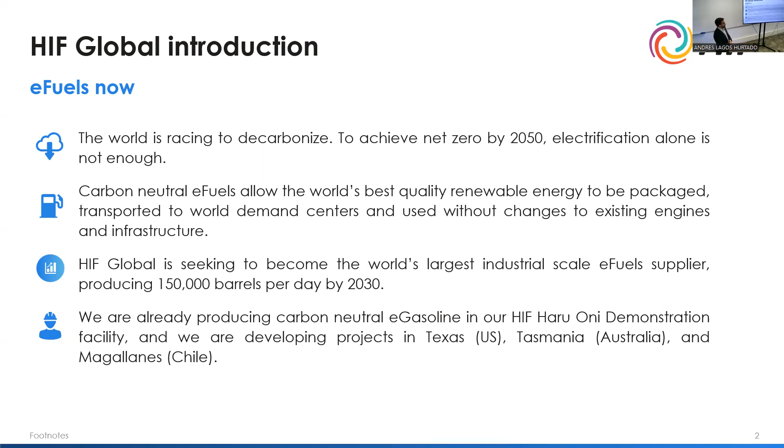We are already producing carbon neutral e-fuels in our pilot plant, demonstration plant in Magallanes, that has a wind energy turbine that turns power into gasoline. Okay, so why e-fuels? Electrification alone is not enough. That's our business case, because as you can see in the graph, we have in the y-axis the amount of energy per liter, and in the x-axis the amount of energy per kilogram of different energy carriers.

As you can see here, the lithium batteries are really close to zero. This means that they don't have enough energy density to be a good application for trucking, for example, where weight restrictions are really important because of road restrictions. For aviation, the volume of the energy carrier is also important, and for shipping, the price is the key feature that is a driver of the industry. So, for example, liquid hydrogen and compressed hydrogen are really expensive to store and to manage, and they don't make a good business case for the shipping industry.

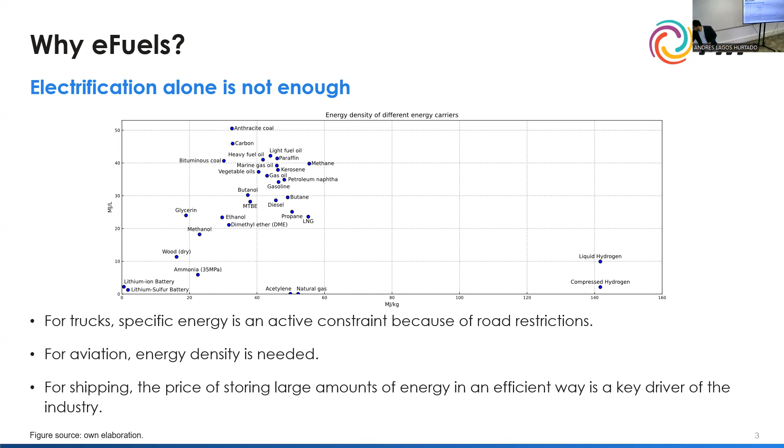Okay, so our Haru Oni pilot plant is already working. It's demonstrating that this process can be achieved, that we can turn renewable energy, wind power, into gasoline, into a good energy carrier. The Haru Oni facility has a 3.4 megawatt turbine. It's just one wind turbine, and a production capacity of 20.5 kilograms of green hydrogen every hour. This turns into 350 tons of methanol each year, and also we distill 130 cubic meters of gasoline each year.

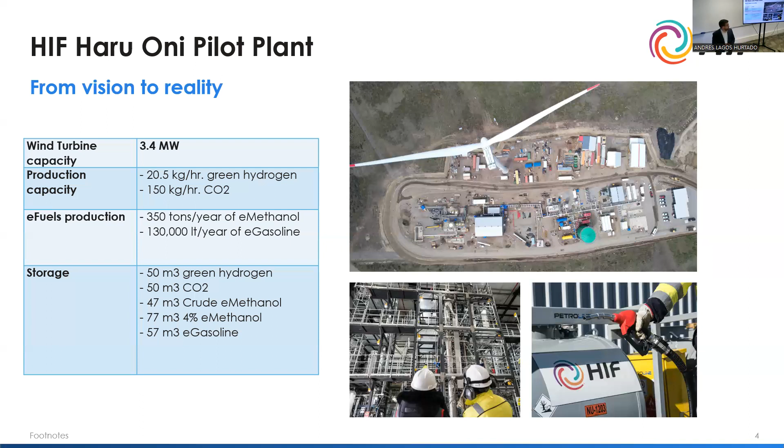There's a nice photo of Haru Oni. It's really south in Chile, where the wind is really strong. Hope you can see it someday, because it's a really nice demonstration plant where all the process is explained.

So to the problem that I investigated: the e-fuel plant optimization challenge. In an e-fuel facility, we have here on the left the input power. We have like a fixed wind park, for example, with a profile that we already know, and we want to know whether we must do a big investment in electrolyzers, for example, with low capacity factor, where the machine is not used all the time. Or in the other extreme, a small investment with high capacity factor. If we install a little electrolyzer, we can use it most of the time. And the optimum is somewhere between those two extremes.

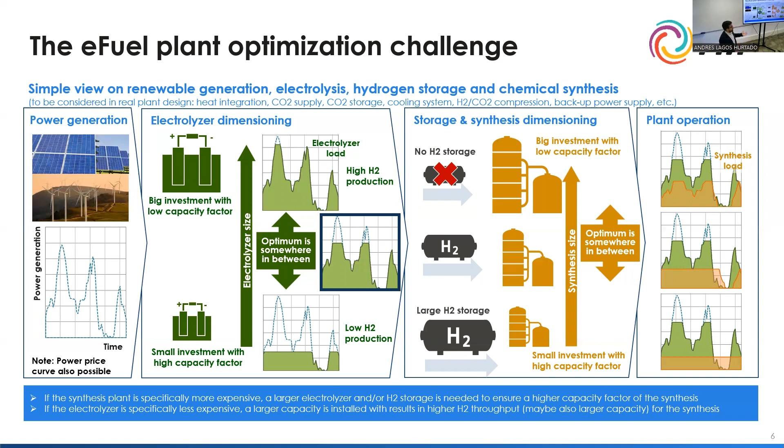For the storage and the synthesis of methanol components, it's the same problem. We want to know how much of each component we should install, taking into account the capital investments, the operation costs, and also the revenue that they are going to give us.

The proper problem statement is the following. Here we have an example process flow of the methanol plant. We have energy that comes into a storage unit; this could be a battery, for example. Then the energy goes to the electrolyzer that makes hydrogen, and that hydrogen goes to the compressors, to a storage unit or a tank, and then the methanol synthesizer. And all these components have to be designed, have to be sized properly. So the optimal plant design problem is to determine optimal capacities for all plant components, all the components encircled in dashed lines, to minimize the total annual cost of the system.

Okay, so this has been done for other industries, for the electrical networks. It's a problem that has already been visited. But there are some specific challenges for the power-to-X industry that have not been attacked yet. Some of these challenges are ramp restrictions, for example, minimum loads for components, and part-load efficiencies for some transformers. So when you operate at nominal capacity, efficiency is different than when you operate at half capacity, for example. And the investment scaling is non-convex. This is the one that is most interesting to me, because mathematically we did a good approach to it.

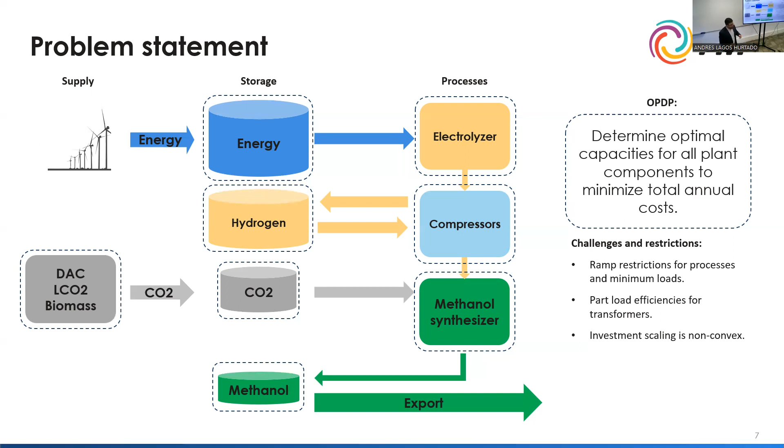So to explain a little bit more about the last one, the investment scaling is quasi-convex. This means that if you install double the capacity of one component, the costs don't scale twice as much, but they scale by a factor with a power of some number between 0 and 1, usually 0.6 or 0.8. So this function that we want to get into the objective function is non-convex, and that's a really big problem, because as you can see here, the optimization methods don't get to the global optimum, but rather to a local optimum. Constraints make the solution initial-point dependent, and global optimality is not guaranteed. There are some methods available, and we are going to explore what we did about it.

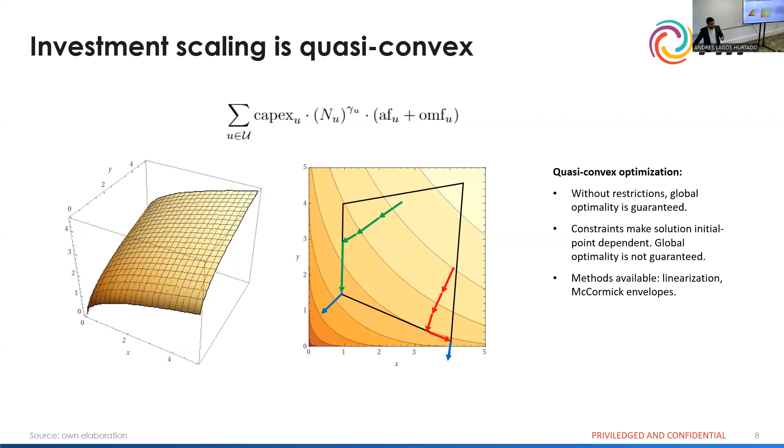The first thing that we did looking into this problem was a literature review. So in this table is the literature capability summary. There are several tools that attack this problem that are designed for different industries. Most of them are for power networks. Some of them are simulators, some of them are optimizers. But none of them attacked all the problems that we want to attack.

For example, oemof seems like it doesn't attack any problem, but actually we base our structure, our mathematical structure, on oemof. As you can see, there are several ones that attack many of the problems, and FINE is the one that we compare with when we are doing the optimization.

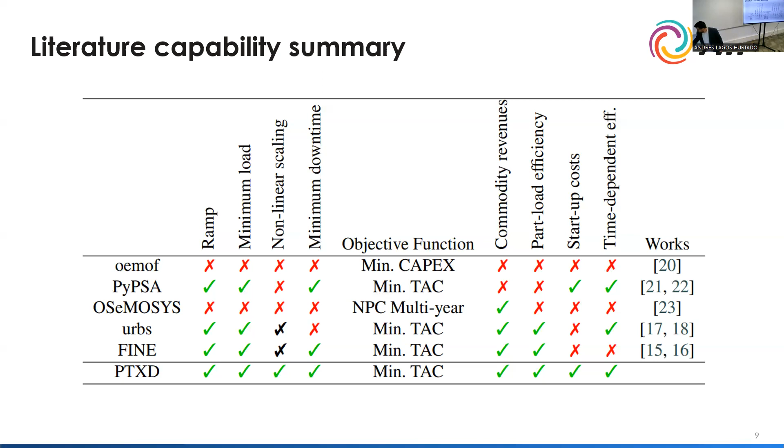Our scientific contribution in this thesis is that an optimal plant design model is proposed to determine the parameters of a generic energy system. This means that we can input to the model several plants, whether we are aiming to make gasoline, methanol, or ammonia, or whatever, or your sources are wind or solar, etc. You can input different things and output different things.

Our model addresses every challenge of the previous table that is needed for a power-to-X plant, and it provides an approach for optimizing the design of e-fuel production plants. The implementation of this model shows significant improvements in computation time over FINE, the existing tool that we tried, and proposes a better business case that is validated in an out-of-sample simulation.

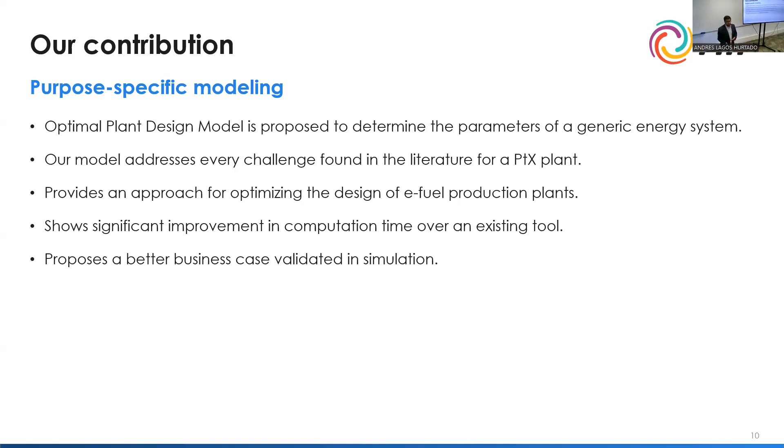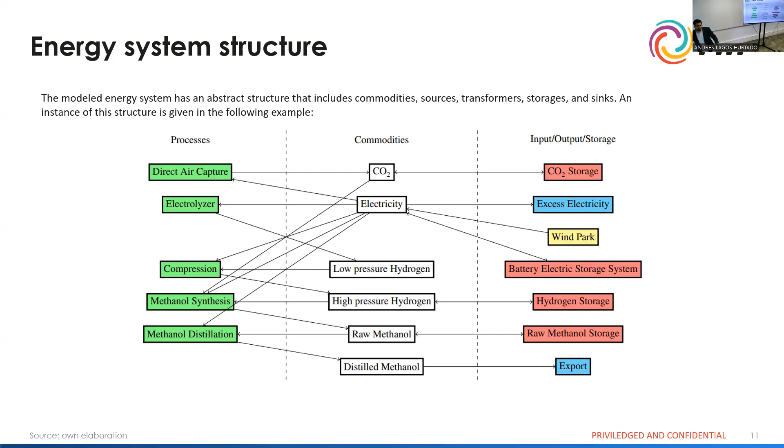And the excess electricity. The excess electricity is just to give the model freedom to do whatever it wants on every time step and not be constrained. If it wants to waste energy, it can do it, because it is necessary sometimes: when the batteries are full and the wind park is operating at maximum capacity for several hours.

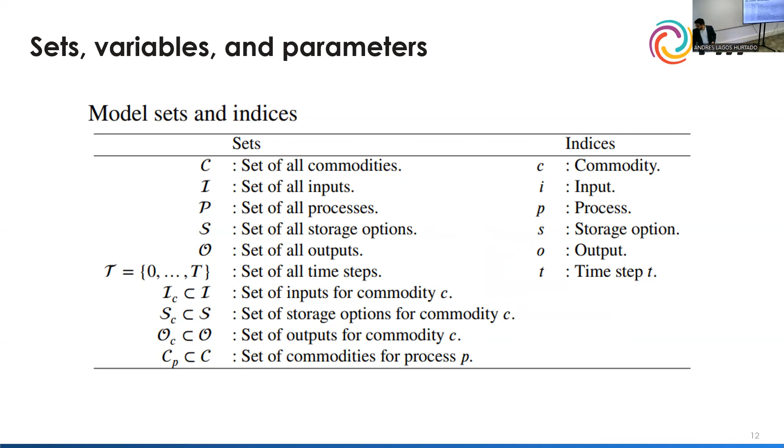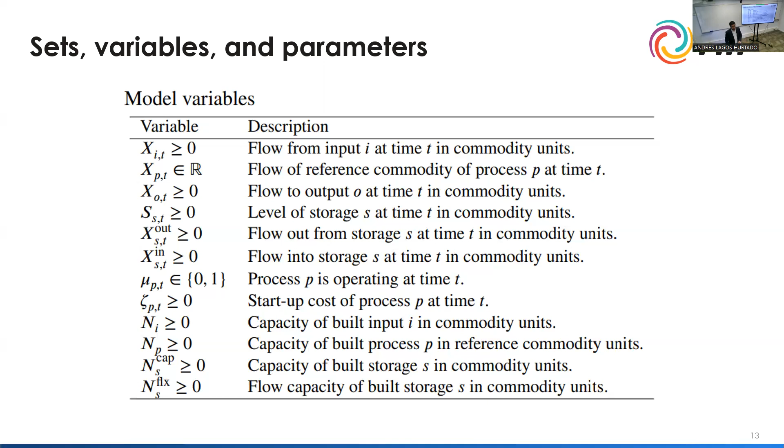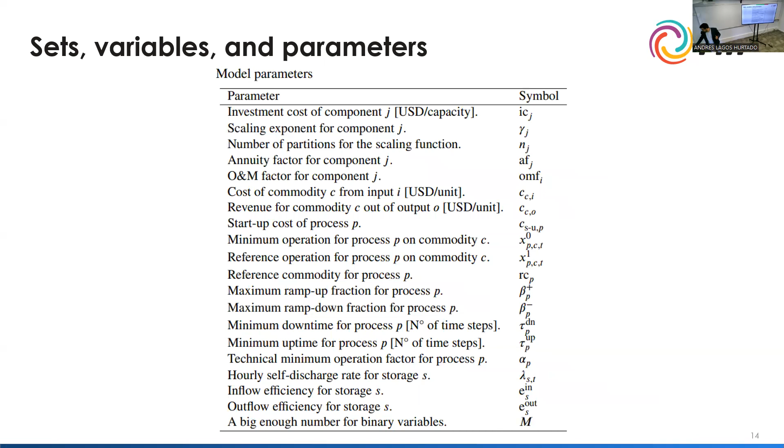Mu is the only binary variable in this model; it tells if a component is on or off, and the N's are the design variables that go to the objective function. So in each time step, X should always be less than N. N wants to be minimized because it yields cost, but X wants to be maximized because we want to produce more methanol. Those are the variables of the system, and then we have all the parameters necessary for this optimization. If you want to see them more thoroughly later, we can, but I don't think it's that relevant.

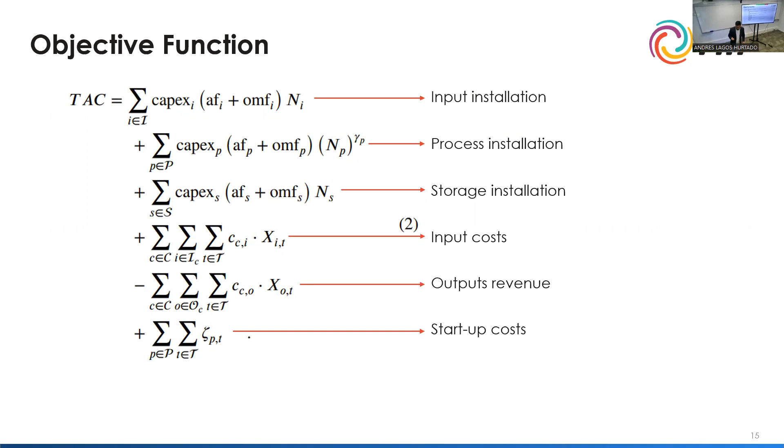For example, in this case, we fixed a price for the methanol, and we sell it. And that translates into a minus sign on the objective function. We could also have a PPA contract for electricity to give out to the grid. Also, it would give us revenue, and we can also put startup costs on this objective function for when starting a component has a cost.

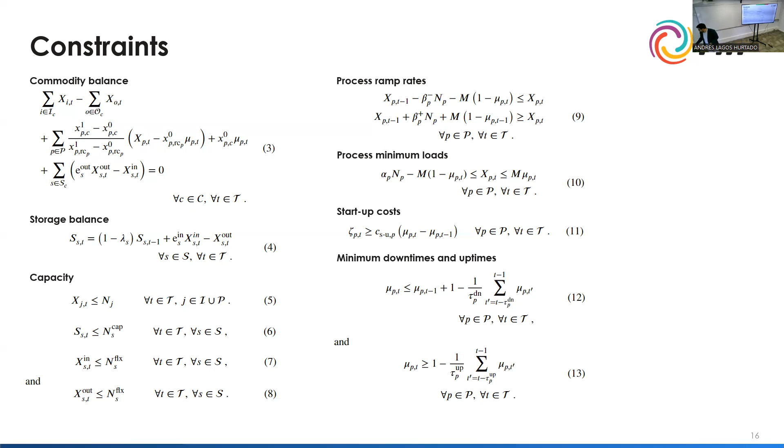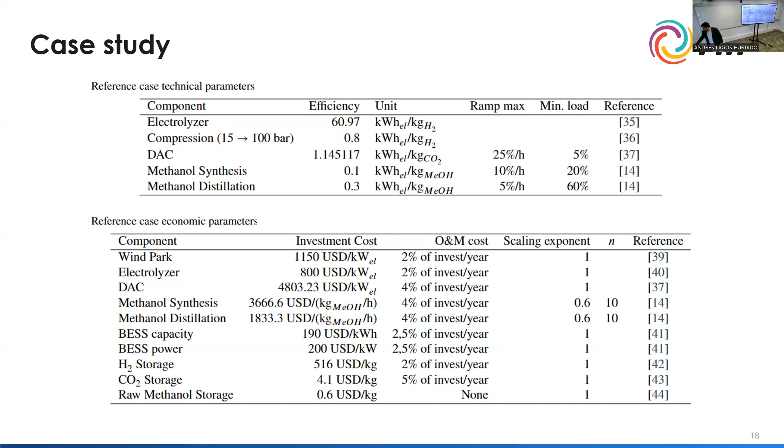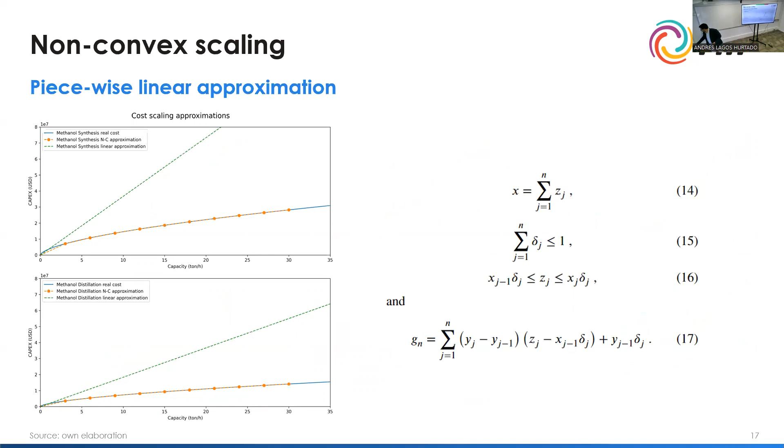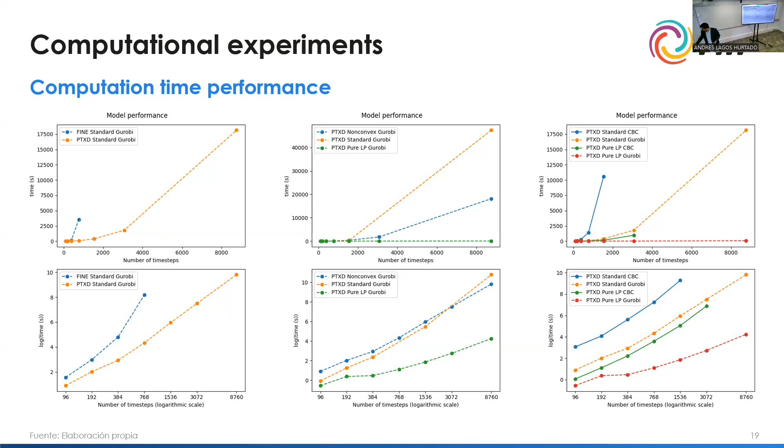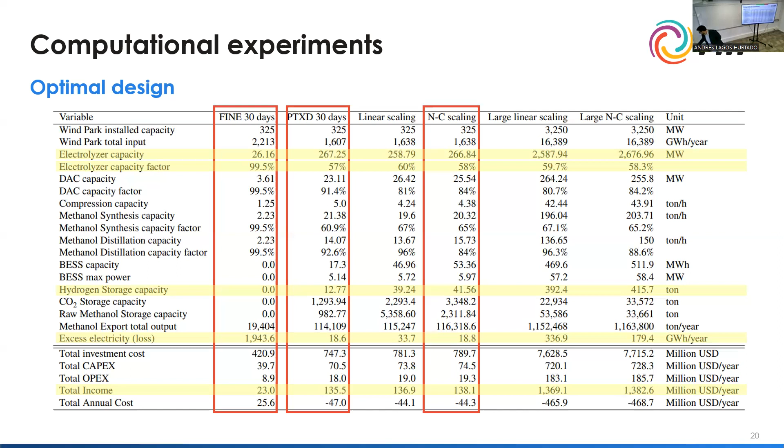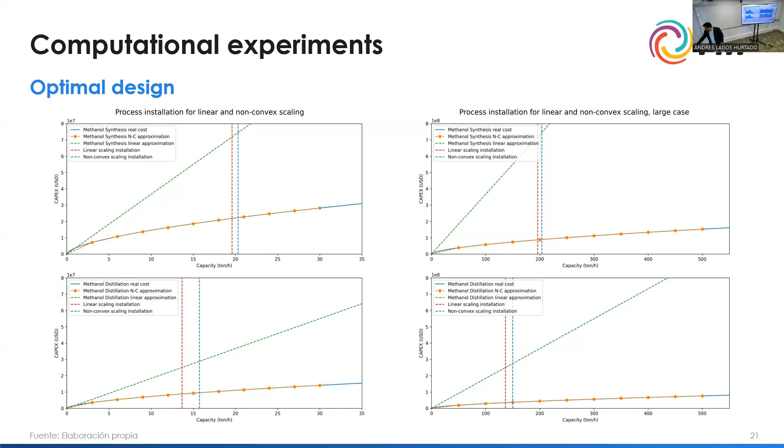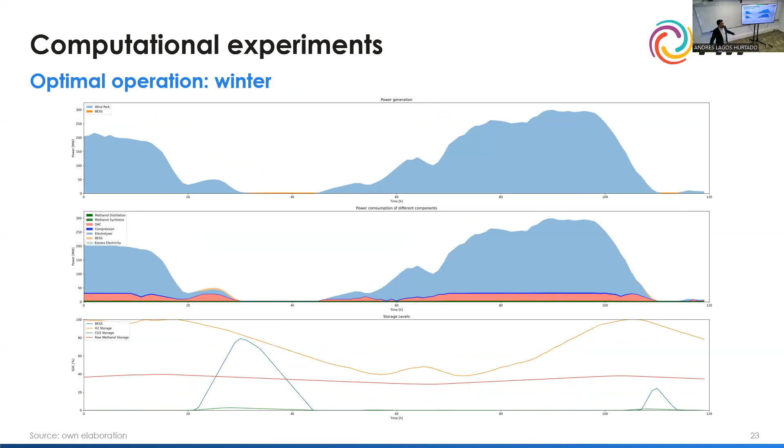Okay, so the problem that we have now is that the model knows the future, and that's why it can output an optimal operation. We know the present, past, and future. We did an optimization, and we have an optimal design with a perfect operation that knows everything. So we want to know how attainable this operation is just by a simulation, something that knows the past, the present, and no more.

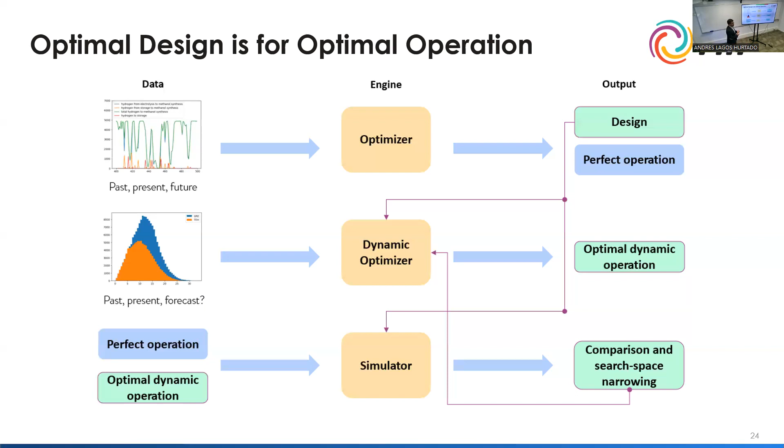So for this case we constructed a simulator that takes this perfect operation and an operation that we propose and compares between them. With this approach we should know if we need a dynamic optimizer to do the optimization on the plant. And the results are really great because we do not need a dynamic optimizer for this plant.

Also, comparing Fine and PTXD, Fine performed really poorly because the 99.5% capacity factor that Fine supposedly attained is not attainable without storage. Without storage, you cannot attain this 99%, and that's why it has a 33% capacity factor, which is really low.

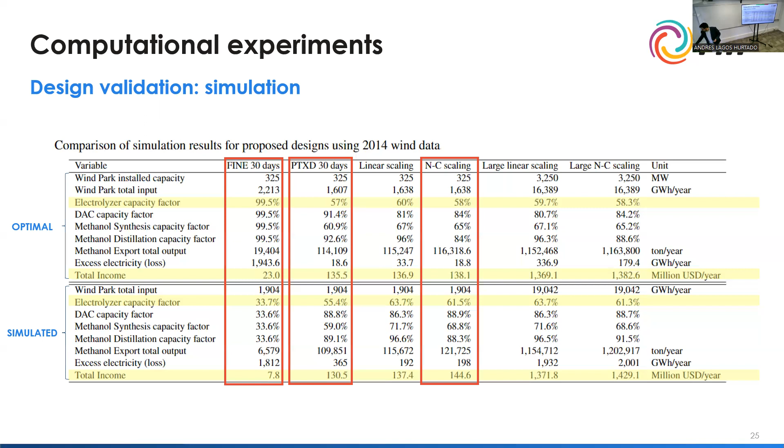As a way of summarizing, a mixed integer linear programming model was proposed for a generic Power-to-X plant that addresses all proposed challenges for this industry. The model optimized a theoretical case near our project in Patagonia, and we showed that purpose-specific modeling improves a lot on computational time and overall economic convenience. The resulting designs were also validated with an off-sample simulation.

The next steps for the model are the dynamic optimization. We have to do a dynamic optimization model for more complex plants where it may be needed, and to apply this to a system that has non-convex scalings for more than one component and also for storages.

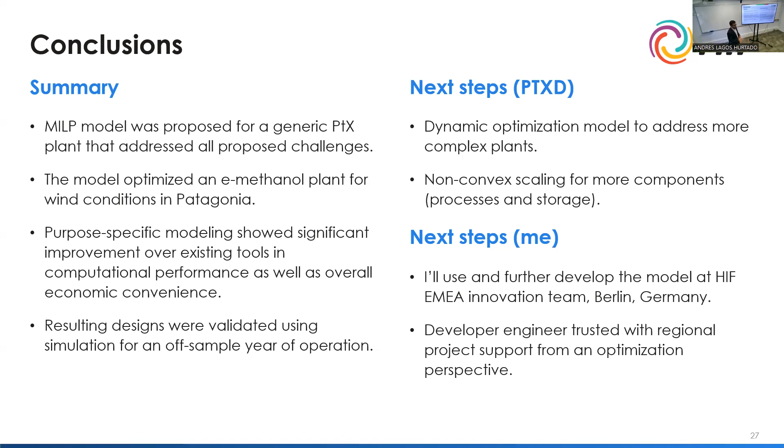Next steps for me: I'll use and further develop this model as part of the HIF EMEA innovation team in Berlin, Germany. I'll be a developer engineer tasked with regional project support from an optimization point of view for all the regional projects of HIF Global.